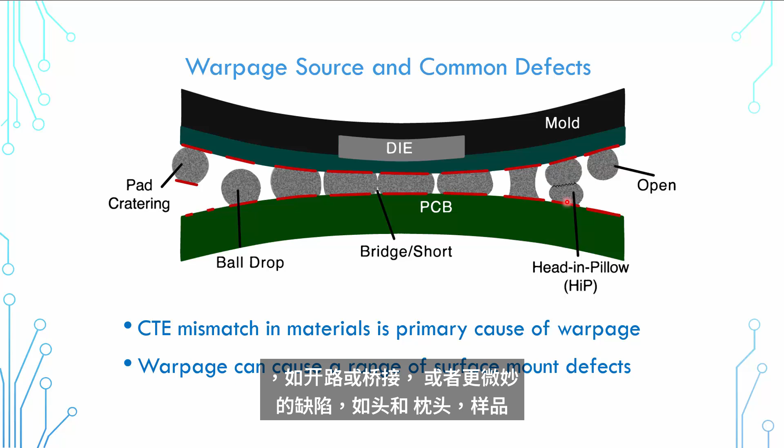So CTE is coefficient of thermal expansion. Something like a die in a package is going to expand at a lower rate than the mold and the substrate layers, and when those expand at different rates, you're going to get shape change in the vertical direction. And then when warpage and thermal warpage occurs, depending on when in the profile it happens, you can have these types of surface mount defects like an open or bridge, or something more subtle like a head in pillow where the sample may pass electrical tests but then fail later in the field.

Okay, so today we have a bare PCB setup in our AXP 2.0. As you can see here, you can see the PCB actually inside of our oven. You'll also be able to see it here on our screen. So the AXP 2.0, to do a quick equipment overview, we have our optics above, we have the oven here, we have motion systems on the sides, and all of our cooling mechanics are down below the tool.

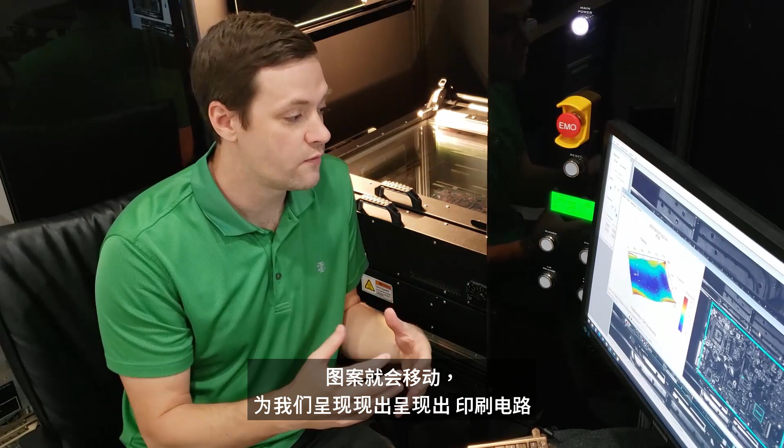So here on the screen, you will be able to see a live view of our actual PCB. You can see my hand moving there, and then if we quickly take an image, the patterns created by our shadow moiré technology are going to shift and give us a rendering of that PCB surface. In this case, I've taken the global warpage as well as looked at one local area on the board. All right, so we'll take a look at what this does as we heat it now.

All right, let's take a live look in here. I've made a temperature profile to use for this run. This is emulating a reflow profile, which is a common use of our tool. We also will recreate reliability profiles or really any thermal excursion that you want to create. But the system just took an image.

We're going up to reflow temperatures and capturing the shape of this board as it heats and will here soon cool. So we started around 600 microns. We're now near 1600 microns in shape, so the board is warping. We're hitting peak temperature now, and our cooling process will start as that occurs. You can hear the fans start to kick on. So we'll check on this as the profile ends.

All right, so our profile just ended. We got through a reflow process, took about 13 images through that. You can really take as many as you want. All of this is programmed in Akrometrix software. The input profile, this thermal profiling, and then the analysis package is really where a lot of the complexity and the meat and the value comes with warpage. So here you have the excursion over temperature. You can see the board actually kind of popped and really changed on the cool down.

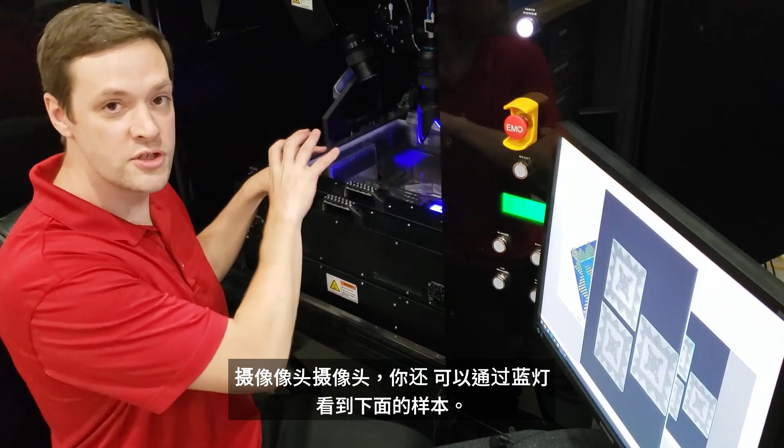So the projection light you can see with my hand, maybe there in blue, the camera above, and you can somewhat see the samples down in there with the blue light. Our acquisition cycle is only about a second with DFP. It's quite fast. In this case, it's going to take a little bit longer to process because it's more data. That's one of the advantages of DFP.

But what you get here, I have an actual balled BGA, and you're actually going to get the solder balls. And we'll look at this later and how you might process this data, because as it is, it's not that usable. I mean, it's cool looking, but what do you do with that information? We need to do something with it besides saying, hey, that's 620 microns of warpage. So this is an application where we use DFP.

We can make a whole video on DFP versus Shadow Moiré. The short version is Shadow Moiré is very robust. It's very accurate across a wide range. If you can use Shadow Moiré, you generally want to.

If you have discontinuous surfaces, sudden height change, a connector, things like that, a balled BGA, DFP is going to be your better answer. It handles the step heights and it has better data density to it, but it's a projector, so if you zoom that projector out, which you can here, that accuracy is generally going to get worse as the projection gets larger. So we'll look more at processing now. How do we take this data and work with it?

Now that we've seen the system in action, let's take a quick look at the software that really drives all of this functionality. So we'll start here with the Profile Generator software. This is the software to create an input temperature profile to pass to the other softwares and have the oven and cooling systems emulate your real world conditions.

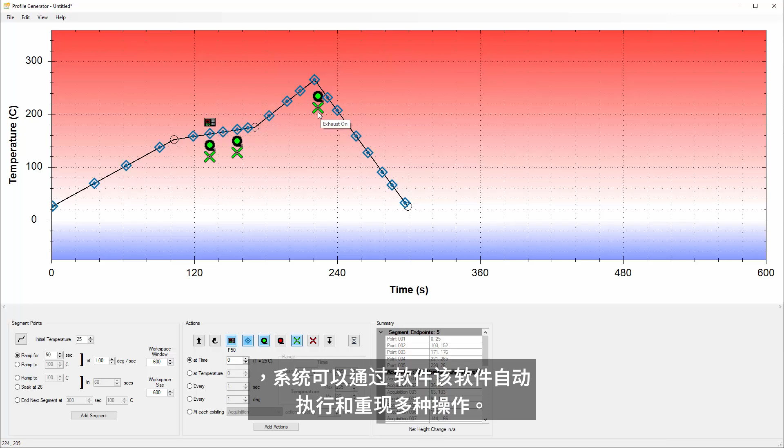So this is a profile in time and temperature in the Y dimension where you can really time it out however you wish. Add in actual acquisitions that you want to take, as well as different cooling functions. You can add in different thermal commands. There's a wide range of actions that the system can automate and reproduce with this software. So we'll take the file from Profile Generator, and then we're going to use it next in the Thermal Profiler software.

The next step in the software is surface measurement. This is where you're going to come in, you're actually going to interface with the equipment, where you take your measurements, you set up your tests, and you control the different system variables. You can also do a lot of the processing steps up front or later in surface analysis, which we'll show.

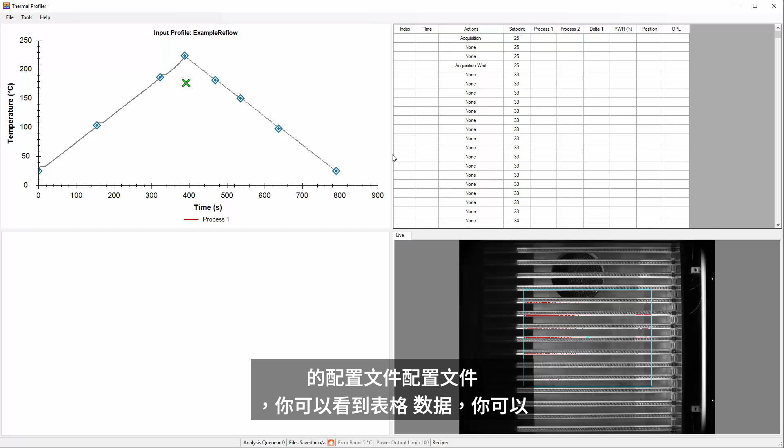So you'll control brightness, get your test set up, and then if you want to run over temperature, similarly you're going to have an interface with Thermal Profiler. Now you've already seen this with the live equipment. You saw me using these two softwares, so I'll keep this brief, but essentially you load in the profile that we create in Profile Generator. You see the tabular data as it goes. You get a live view of the sample, and then your results will start to form below.

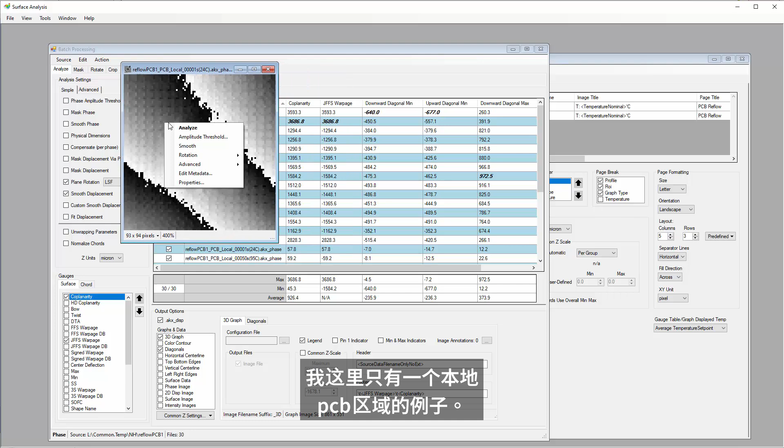Alright, so we have our data now, and we can bring that into surface analysis. This is the major analysis package where we can look at all the data that we took. So I have just a single example here of our local PCB area. We can take a quick rendering. We can look at it closely. There's a lot of surface roughness, so we can come in and smooth that. That's probably a better representation of how a BGA would attach to that area.

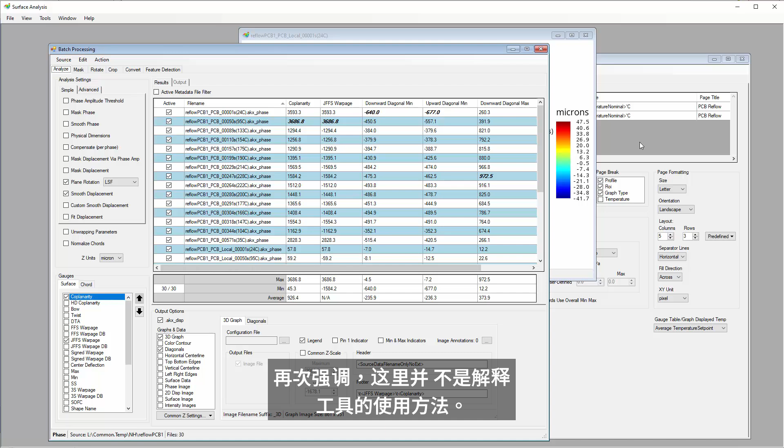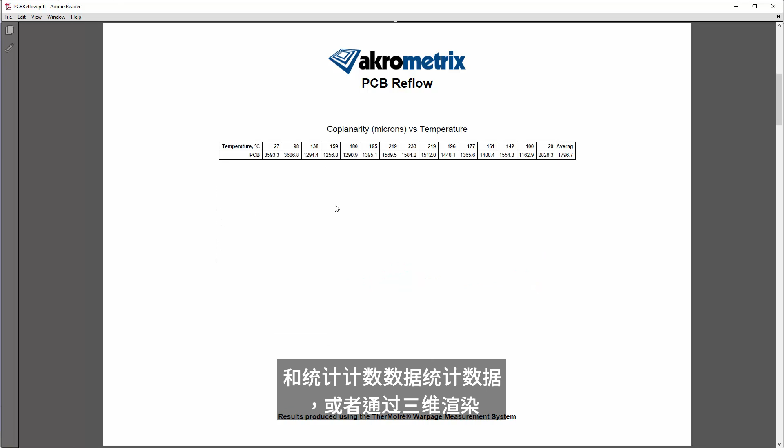And at the end of the day, you're going to take those files that were created and you're going to batch process them and then look at essentially reports, so statistical information. So batch processing interface, there's a lot to see here. Again, this is not an explanation of how the tool is used. You load in the files and then kind of a reporting interface, so you can create at the end of the day a report to look through and see what this board did over temperature, either through gauge information and statistics or through 3D renderings to show you kind of what happened.

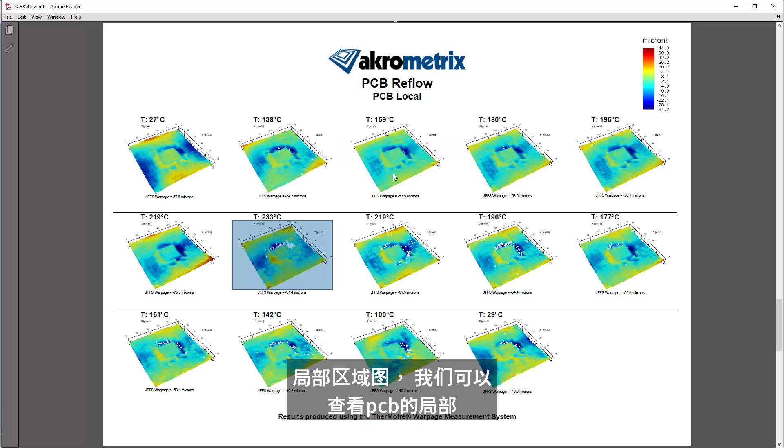You can do gauge plots, local areas. We can look at the PCB local, as we did before, get diagonals of that. That's what a lot of your output at the end of the day is going to be. And this can be done on very, very large quantities of data and then looked at statistically as well.

So we still need to look at our DFP data, and we'll also look at how you might compare these two data sets together. Going back into surface analysis now, so here's our DFP data from our BGA, and we've actually used a function called feature detection to locate these balls in space. As we discussed, the BGA with balls, while it is an interesting data set, if you're going to look at it for warpage, the balls are really going to be almost all of your height.

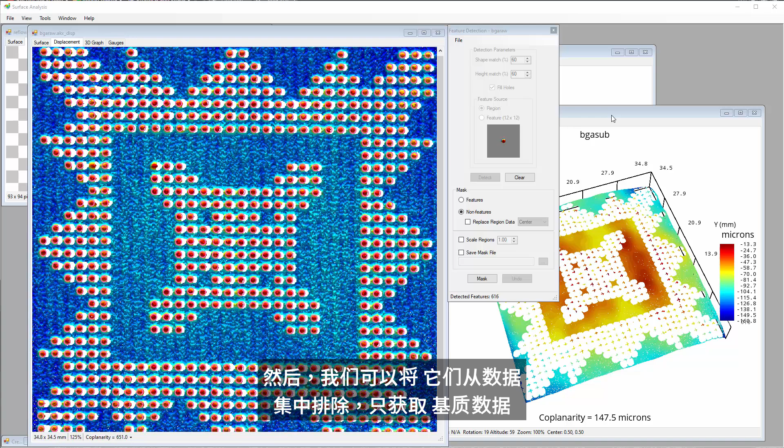So this is a software we've built in, and I won't show the full use, that's used to automatically locate those balls, and then we could exclude them from the data set and get just the substrate data, kind of as you see here in the underlying substrate. Or we could do something with the ball peaks, in this case, like actually pulling out the highest point of each individual sphere and plotting that.

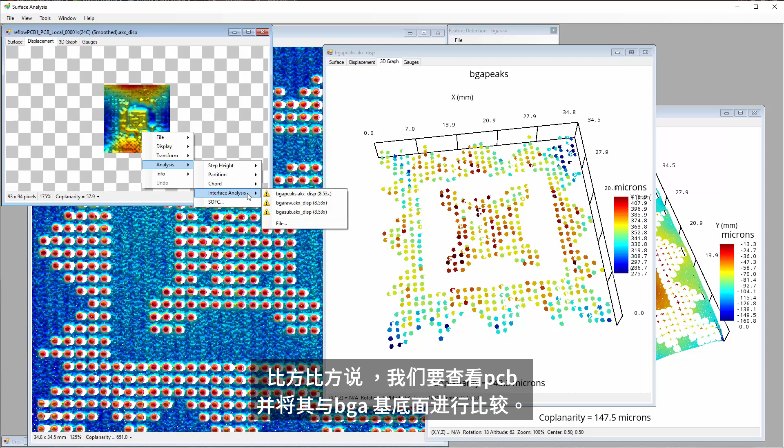If we want to compare these data sets, we can also do that within the software. Say we want to look at the PCB and compare it to the BGA substrate. That can be done in interface analysis, and this is a software that's actually kind of being overhauled right now. You see there's actually a version of it within surface analysis. This used to be, or traditionally was, a separate application.

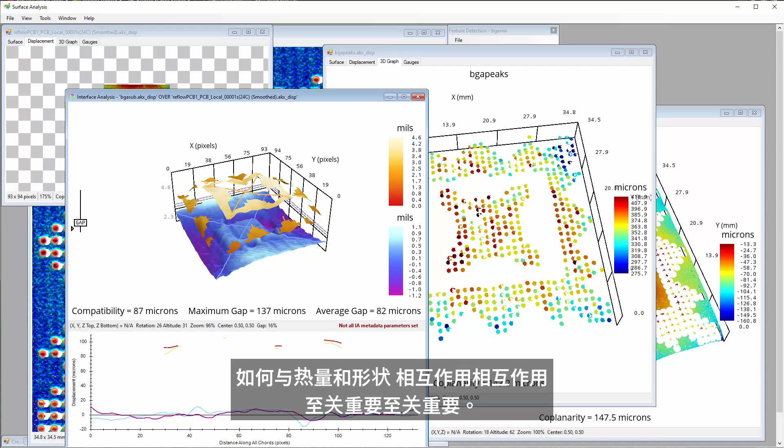But this is really the more important data at the end of the day, is how these gaps are between these two attaching surfaces, and then what might happen to them as temperature changes. So these variables are really critical for your warpage analysis, for attachment of your packages, over temperature, and how these surfaces will interact with heat and shape.